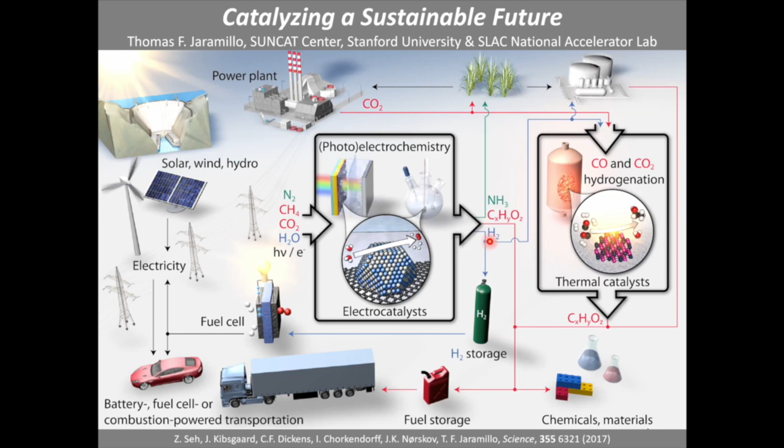And so this really fits within the theme of what we're talking about here with hydrogen and transportation. It's a big molecule that we put a lot of attention to. And let me just give credit to and acknowledge my many partners in this. We are a very collaborative organization, over 70 researchers, as we integrate theory and experiments to ultimately create this new future ahead and open up new possibilities.

So we're very much focused on these chemical transformations, very much focused on catalysis and catalyzing these transformations, and then developing devices and new technologies, new processes that make use of those. And very importantly, we are a partnership between Stanford University and SLAC National Accelerator Lab that brings different resources, different expertise to attack these very important and challenging problems.

So you see a listing of a number of the Stanford faculty that are core to the SUNCAT Center, senior personnel through the National Laboratory, many different collaborative partners, both inside of our ecosystem of SLAC and Stanford, as well as beyond. This is really just to give you a framework on how we operate - theory is, we're a very balanced organization, again, with theory and experiment.

So we have a lot of theory guidance, computational modeling, typically at the atomic and molecular level, that provides some guidance as to what kind of possibilities might exist in developing new processes, new catalysts, new technologies. Then we have a range of experimentalists. I am predominantly an experimentalist who synthesizes new materials, new formulations, new structures. We use advanced tools to characterize them, including tools you can only find at national labs involving synchrotrons or free electron lasers. We test things out to see what works and what doesn't, then feed that right back into theory, and wrap it all in a blanket of data science as we strive to capture all this data and take on new approaches to understand how to make things better ahead.

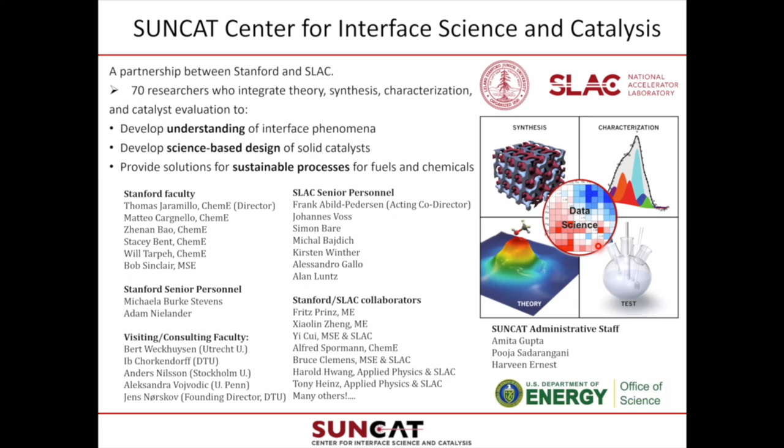So in my last slide, I want to seed the discussion for our particular panel this morning here in California, afternoon and evening perhaps elsewhere. And that is really the future of transportation.

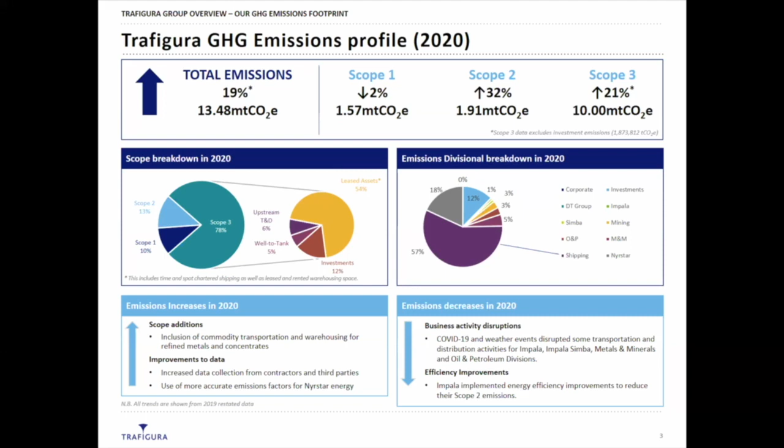And what is the regulatory framework, and what do we need, and what's the challenges? About ship propulsion today, ships burn MGO, they burn low sulfur MGO, high sulfur fuel, they burn LNG, they run on LPG, but the key transportation fuel as of today is heavy fuel oil. In terms of what the key challenge is, again today, the regulatory framework does not provide sufficient opportunity for the industry to decarbonize sooner rather than later.

Just a little bit about global shipping emissions, just to frame it. Shipping accounts for about 2.5% of global GHG emissions. It accounts for 80% of global trade. So shipping is a vital thing transporting our goods around the world. So if we can decarbonize the shipping industry, then we have come far.

The good news is it's possible. The technology is there. The key engine makers are bringing forward the propulsion of the future, and I'll come to what we believe is propulsion of the future, but that is there. It's ready by 2024, 2025. However, a key challenge is the economics.

Everybody says that they want to decarbonize. The ship owners, who account for 78% of our emissions, say they want to decarbonize, but the numbers don't work. So if we go a step back, in 2019 we initiated a study with a leading American university, unfortunately not Stanford, but that will be the case in the future, I believe.

And one of the key conclusions from this study, which took half a year between them and us, was that the transportation fuel of the future is hydrogen-based. So to answer one of your questions earlier, Thomas, what energy sources can be the transportation fuel of the future? We are certain the transportation fuel of the future is hydrogen-based. When we say that, we mean green methanol and green ammonia.

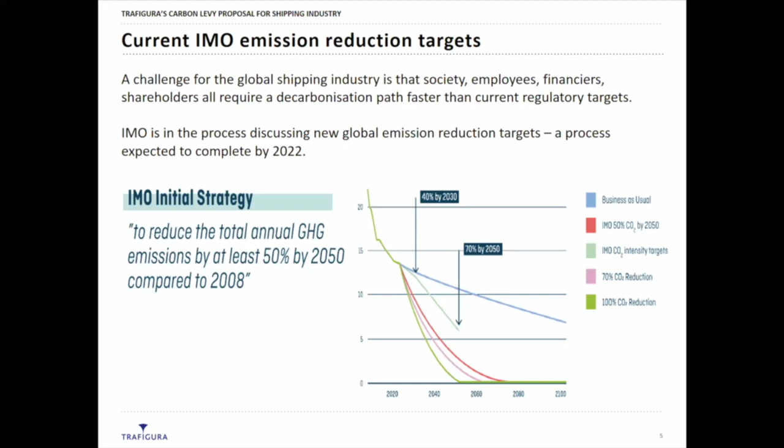However, to do something, we need to get through a highly complex and bureaucratic IMO. So we need targets to be revised. It's happening, but then we also need a regulatory framework to change the fundamentals of how the industry can invest into low and zero carbon fuels.

Last year we brought forward our IMO shipping proposal, which was the first one. About the IMO, it's a highly bureaucratic organization. There's 174 member states, it's consensus driven, and there's a lot of politics involved. You have a lot of small island states which are afraid of higher transportation costs.

You have commodity exporters, such as some South American countries I will not mention, who are afraid of having increased exporting transportation costs, thereby making their commodity uneconomical. So there's a lot of thought that needs to be put into mind when you need to get through the IMO with a carbon levy proposal.

We calculated that we need a levy of $250 to $300 per tonne of CO2 equivalent emissions. This is likely to come down over time as electrolyzer technology improves and as the industry uptake of zero propulsion ships becomes the norm.

What has been important for us, and we believe for the industry, is that we are very engaged within the industry in various associations, etc., in terms of understanding what it takes and how the industry can make this happen and support a carbon levy. Probably for the first time in history, we have all players in the industry asking to be regulated. Certainly chartering traders have not asked to be regulated before, but this is simply because we need the regulation to cost-neutralize the low and zero carbon fuels.

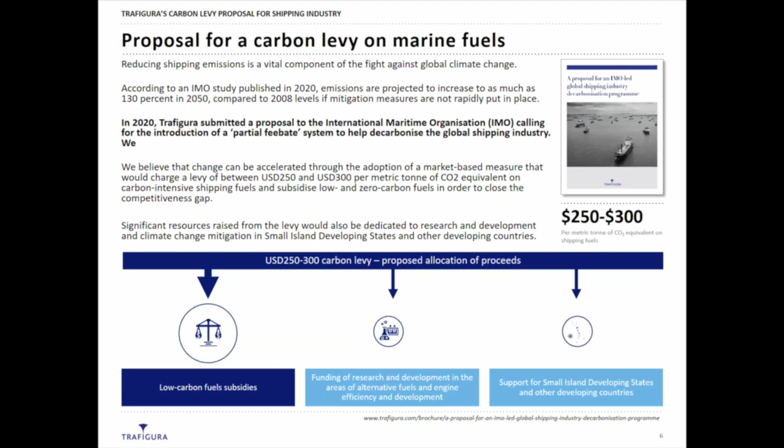And now the small island states, who we've been working with separately, have brought forward a proposal at the next MEPC meeting - Marine Environment Protection Committee, which is the governing IMO meeting - where a proposal for a carbon levy is now to be discussed in June this year. That's fantastic.

One of the key challenges IMO member delegates have is that you have climate ministers and transport ministers who say we want to decarbonize. However, one of the challenges we see - and we participate in a lot of discussions with NGOs, with World Economic Forum, various organizations that ask for our participation - is we see politicians talking, but we don't believe that they truly see what it takes to change.

And what it takes to change, again, is the carbon levy. The transport and climate ministers can actually go and push the IMO member delegates, and they need to do it. But they need to understand what they need to do.

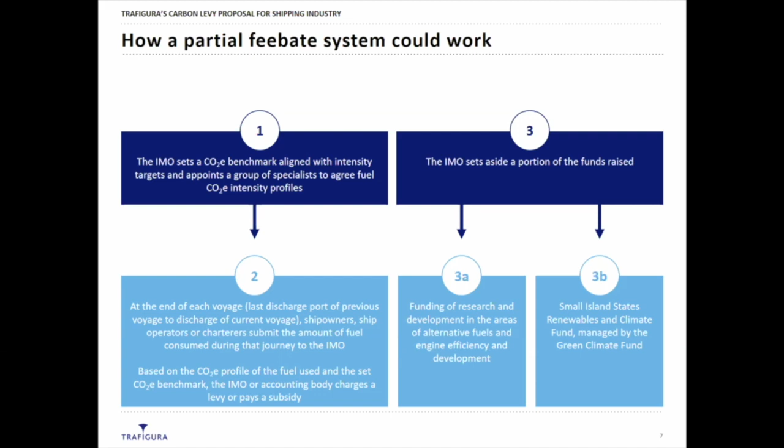We're working in the Getting to Zero coalition, one of the many coalitions, which is World Economic Forum run together with Global Maritime Forum. We have a target on targeting these ministers for COP26, and we are very hopeful it's possible. But even two months ago, a lot of people were very pessimistic. Again, we need the regulatory framework in order to make this competitive.

Just a little bit about how we intend to do it. The slide here, again, defines the intensity benchmark - we set the energy intensity profiles, calculations come out. You have high carbon and low carbon fuels.

Within the industry there's another initiative, which is Sea Cargo Charter. The Sea Cargo Charter makes ship owners responsible for reporting the emissions for each voyage. This is a new charter which has been established in October last year. It's great - there's no global accountability measurement on shipping today. This is for the transport industry: dry bulk, tankers, gas carriers.

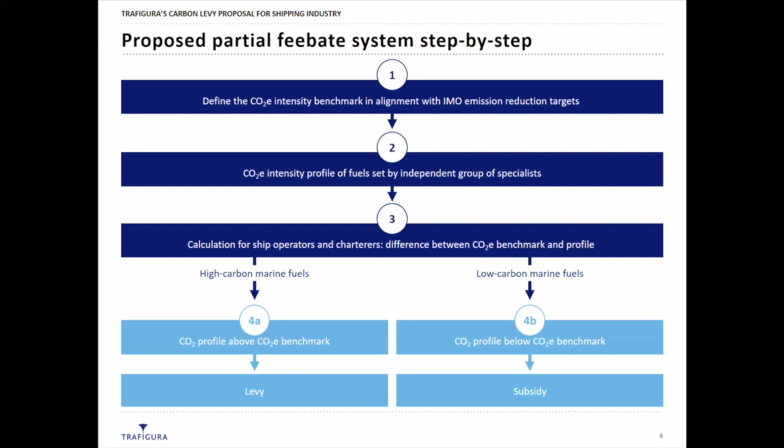Container industry is looking to have a similar equivalent implemented - it's not yet there. But by having the Sea Cargo Charter reporting, suddenly we are in the process - I'm co-chairing that - of establishing a global reporting tool where we actually have data, and we're getting reliable data. Companies are becoming reliant on an apple-to-apple comparison basis on what ships we have used in the past and what emission profiles they have.

My last slide, and I can talk for a long time, just a little bit about why we believe green ammonia is the transport fuel of the future. The CO2 emission saving is huge. It's about 93% compared to today's transportation fuels. Green methanol is less, there's a carbon content.

There's a challenge for the shipping industry. Should we overtake green methanol and burn the carbon and overtake other industries' problems? Or should we just go to green ammonia, which is the cleanest transportation fuel? We believe it's green ammonia, but we are cognizant that green methanol has a chance if you can get carbon capture. And the question is, how will that carbon capture look?

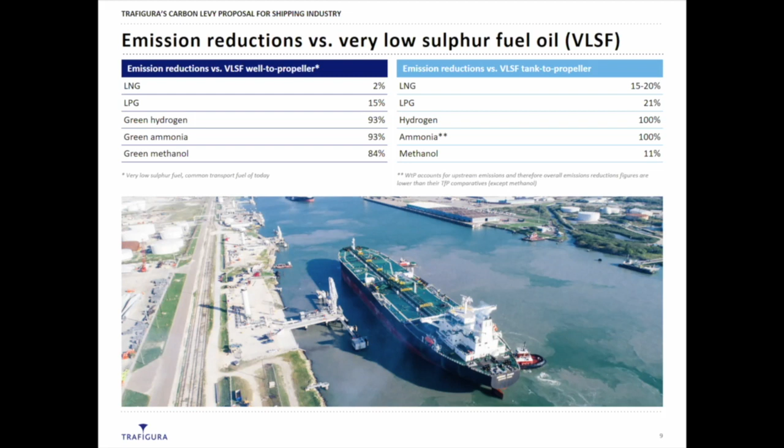That's again for technology providers to determine over time. But again, the good news, shipping can decarbonize. It's not as unrealistic as it was. There's a lot of positive momentum. We need it to happen. It can happen. And huge corporations, including our own, will hopefully be given a chance to choose between low and higher carbon ships sooner rather than later. Thank you very much.

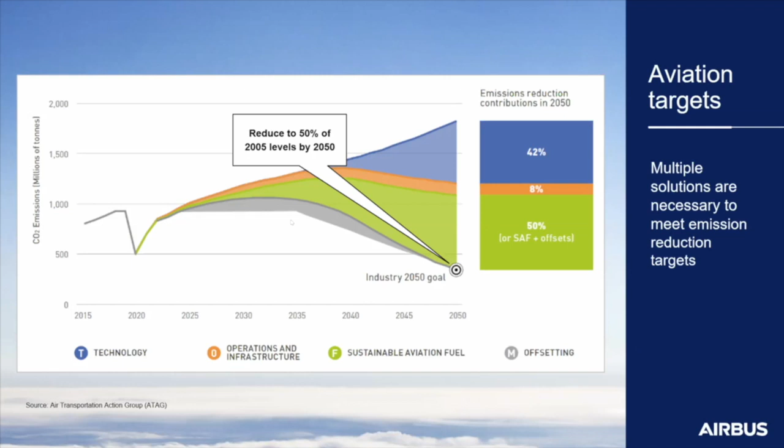All right, moving on, real quick about sustainable aviation fuels. Sustainable aviation fuel, rather than using petroleum, uses other feedstock, whether that's environmental or industrial waste, food byproducts, cooking oil, or even agricultural products like corn for ethanol, or a variety of different feedstocks. And you can use that in today's single aisle aircraft, and of course our twin aisle wide body aircraft, as a direct drop-in replacement for fuel. All modern aircraft are approved for up to a 50% blend of the various biofuel and sustainable aviation fuel products.

And there have been over 250,000 flights and counting, probably well over 300,000 by now, that have some portion of their fuel mix come from SAF. And that's going to be a huge impact, because about 85% of the reduction is right there by using this closed loop. You pull the carbon out of the atmosphere, you put it into the sustainable aviation fuel.

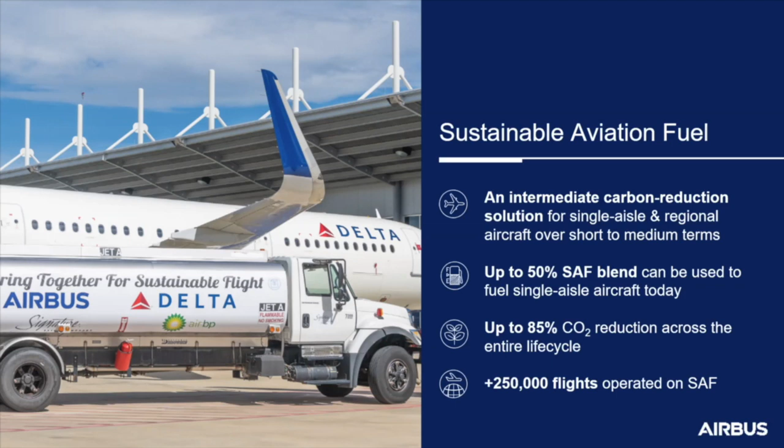The operations is going to be another part. I talk about how automation is going to really help us out, and I've just got a few real quick examples here. A lot of it has to do with routing.

How do we make sure that an aircraft, once it's ready to do its flight, has the most optimized route for its emissions, taking into account weather, other traffic, and winds? Optimizing that so that when the aircraft starts its engine, it can taxi right to the end of the runway, take off, climb unrestricted to altitude where it's most efficient, and as it approaches its destination, stay at that efficient altitude right to the point where it can make a low power, low emission descent, land on the runway without having to hold, without having to divert, and taxi to an open gate without their engines running. That's where automation and big data come in, handling the thousands and thousands of flights every day.

Another thing we look at is how the aircraft themselves operate. We're working on automation inside the aircraft, inside the cockpit, because we believe automation can manage the aircraft better than a human pilot can, optimizing power settings, trim configurations, and all the other settings in an aircraft to reduce emissions.

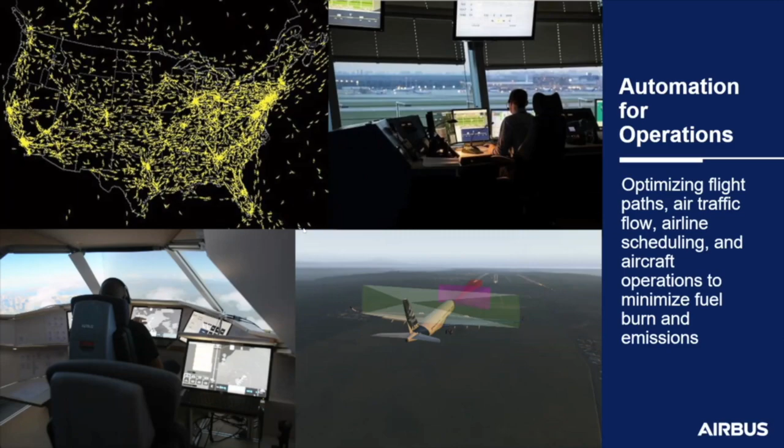As we get into new technology, our big push is hydrogen, and why it's zero emission. It's not just zero carbon dioxide emission, it's zero NOx. It's reduced contrails, reduced cloud formation. All the other climate change gases don't happen when you're burning hydrogen.

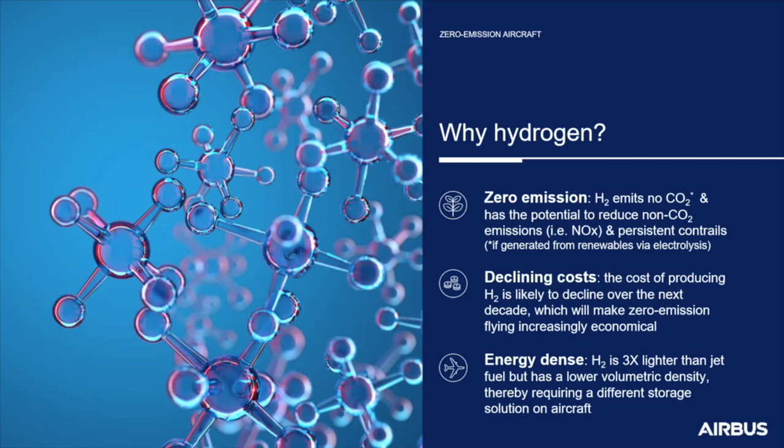I don't need to talk to this group about all the issues and why you want to be using hydrogen. But I'll point out that, as you've heard, it has 3 times the energy density of jet fuel. The issue is it takes up 4 times the volume, and volume is very important. Volume means weight, weight means inefficiency. When you're trying to take these up to 30,000 plus feet, those are very important, and those are going to be the challenges for aviation.

We see hydrogen being used 3 primary ways within aviation. One is direct hydrogen combustion. You can take liquid hydrogen and put it into a jet engine today, and it's going to burn. The Air Force did that on a B-57 bomber back in 1955. The Soviets took a Tupolev, I think 157 or something, and converted it to run on hydrogen back in the late 80s. These are not new technologies, they exist, and we can take an engine today and optimize it for hydrogen.

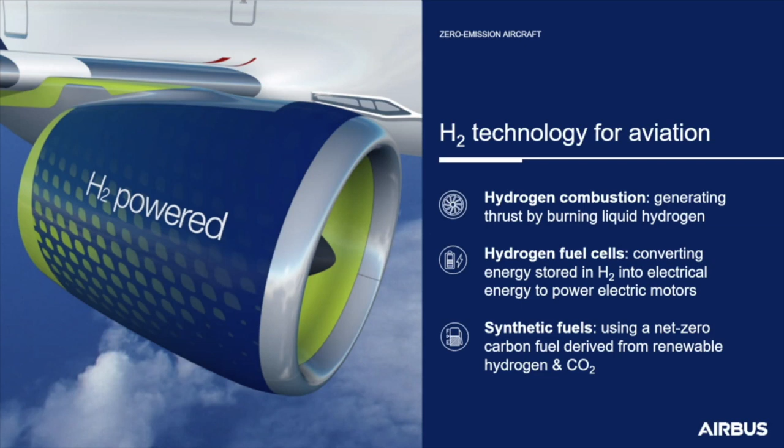Of course, the other option we've heard a lot about is using hydrogen for fuel cells, converting the hydrogen to electricity, and then running electric motors for propulsion. The third is using hydrogen to actually make synthetic aviation fuels, not using sustainable bioproducts and other resources on the ground, but actually using hydrogen along with carbon dioxide pulled straight from the air, creating hydrocarbon chains that can make synthetic aviation fuel. So that's the three ways to use hydrogen in aviation.

The challenge, as we've discussed, is that the technology exists, but we have to bring the weight and the cost down for it to be suitable for aviation. We've heard from people over the last 2 days about availability and cost - they're coming down, availability is coming up, costs are coming down. We see that being not just an issue, but something that's going to be taken care of.

Infrastructure absolutely is an issue. And of course, regulatory acceptance, not just on the regulatory and certification issues, but of course, passenger acceptance as hydrogen-powered aircraft are introduced.

So Airbus, late last year, introduced 3 concept aircraft, which we are calling our Zero-E. You can see the top one looks like a standard or traditional tube and wing turboprop aircraft, holds about 100 people, goes about 1,000 miles. On the bottom is a turbofan aircraft, again tube and wing, 2,000 miles, about 200 people. And then in the middle, you see this blended wing body. Again, it's 2,000 miles, 200 people, but it takes advantage of some real advanced aerodynamics, and optimizes how you would put fuel on board such an aircraft.

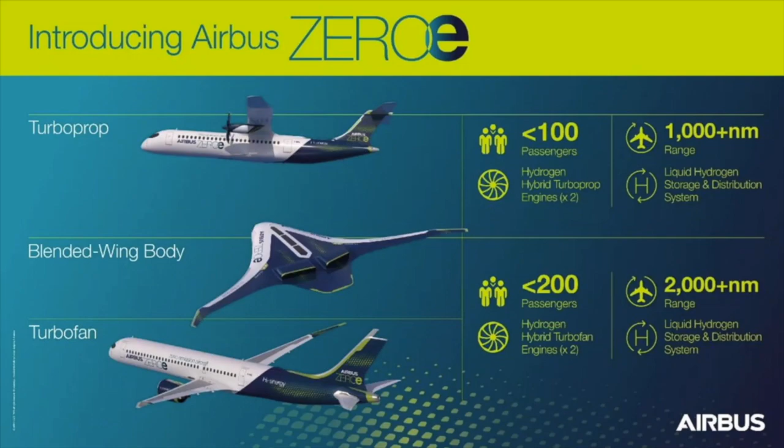A little bit about the engines on these. They are hydrogen hybrid fuel cell electric engines. A big mouthful, but what it means is we're taking the liquid hydrogen, burning it directly in the gas turbine, whether it's a turbofan or a turboprop. But that engine, that turbine is optimized for cruise. But you need more power than just the power of cruise to get up to altitude for takeoff or aborted landings or all that. So in that case, we have an electric motor on that engine to help the turbine get more energy that is necessary for climb.

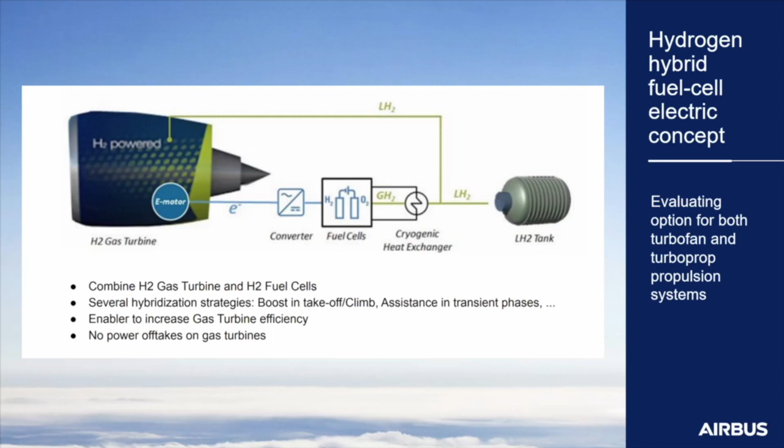And the power from that comes from fuel cells. So we have the liquid hydrogen direct to the turbine, some of that going through a heat exchanger, powering a fuel cell, creating electricity, and having that electric motor for those climb and boost situations. Oh, and by the way, a point here is that fuel cell now can provide all the electrical power for the aircraft. And where we have in today's aircraft, an engine has generators or alternators, it has pumps, hydraulics, and all these different fuel systems on it. You don't need to do that when you have a fuel cell providing enough electricity to run all those systems elsewhere on the aircraft. So the gas turbine is optimized for the cruise phase.

Another aircraft, here's another concept. This is what we call the pod. And in this particular image, it shows 6 of these pods. They're completely interchangeable, and each pod is a complete propulsion system. It includes a liquid hydrogen fuel tank, a heat exchanger, a fuel cell, all the electronics, an electric motor, and a propeller. You note there's something different here. I did not say turbine. This is a fully electric pod that would be a complete fuel system.

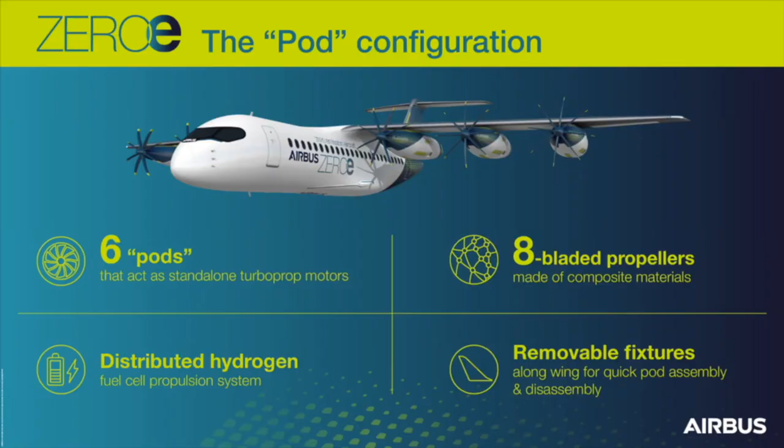And you could design the aircraft. Some might have 2, 4, 6 pods, depending upon what your mission is and what the design point is for that particular aircraft. So a project we just announced last week is looking at this fully electric system. And the point, we did a project over the last several years where we were looking at high power electric motors for aviation. And one of the issues you have when you bring these particularly high voltage systems up to altitude is arcing. You have great losses due to the amount of power running through, quite frankly, massive cables.

So the Ascend program uses superconducting power systems and cryogenics to keep those systems running at optimal efficiencies. So you could use the liquid hydrogen to actually cool the system so that you get, bring the voltages down from like 3 kV to down to 500 volts. And now you can reduce those losses due to thermal issues and become much more efficient. And we're running this program. It's actually been going on for a little while. We just announced it last week.

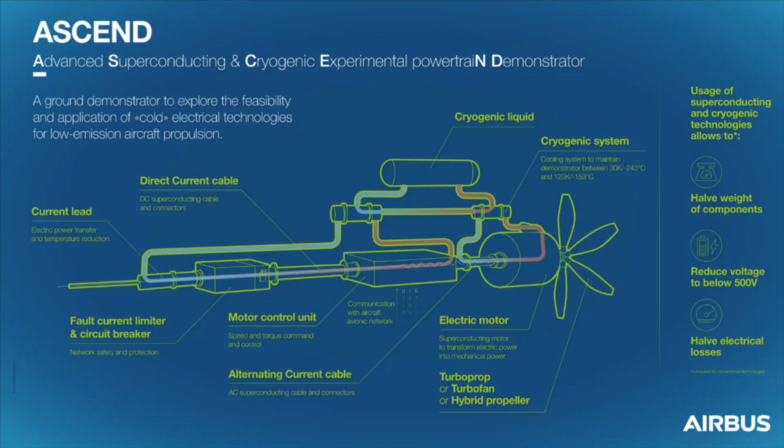We're going to be building a demonstrator, which will be running in our test cell to verify this system as we make the determinations of how we move forward as we are shooting for that 2035 entry. I'll get to the timelines in just a moment.

So here's our path to zero emission. We are looking at a variety of different technologies, pathways, and aircraft configurations to determine not only what is going to be best, but what is feasible and what we can get to the market that our customers, the airlines, will use and can carry passengers and cargo anywhere in the globe. But we're looking at everything.

It's not just about the climate impact. It's what is the potential for the aircraft design, of course maintaining all the safety levels we have today, maybe even going up another level, looking at how you maintain the aircraft, how you industrialize and build these systems, operations, market, infrastructure, ecosystem, all those different capabilities that go into operating in aerospace. Those will all go into the evaluation we have for this next generation aircraft.

And obviously, we are not doing this alone. We have a whole lot of various stakeholders, collaborators, and even some of the folks you've heard over the last couple of days we're working with.

Aerospace doesn't sit in the world of transportation alone. We're learning and contributing to rail, ground, and surface transportation, heavy duty. All those are going to work together to build an ecosystem that will support all these various modes of transportation.

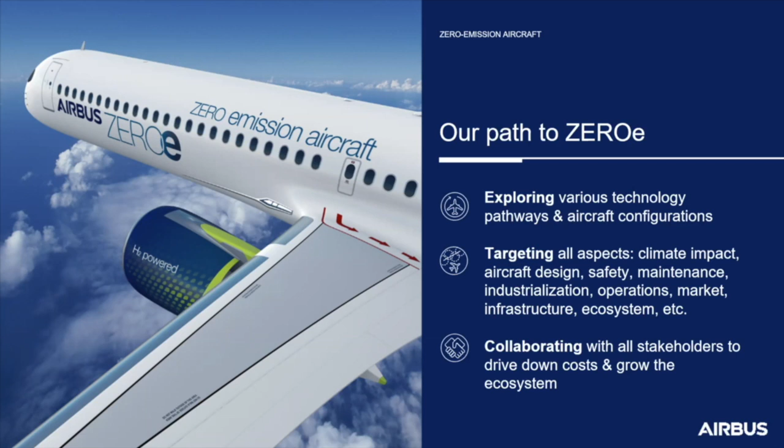One of the ones I want to talk about is we see an opportunity to use airports as hydrogen hubs. You can block out the aircraft, which won't show up for several decades, but think about all the other things that happen in an airport - all the ground logistics, whether it's the equipment supporting actual airplane operations, from baggage carts to tugs, but then all the ground transportation, the buses and the cabs and all the vehicles that go in and out of airports.

You could use the airport as that hydrogen refueling station. Think about all the logistics, all the cargo and the trucks coming and going, and of course heating and power and all the other things that happen, not just at the airport, but at the infrastructure, the industry around those airports. And then when you bring in the airplanes, now you've got a hydrogen ecosystem ready to support it.

So there's a lot of things we're looking at. Several studies are going on in Europe, looking at some specific airports that we see converting to hydrogen hubs within the next decade.

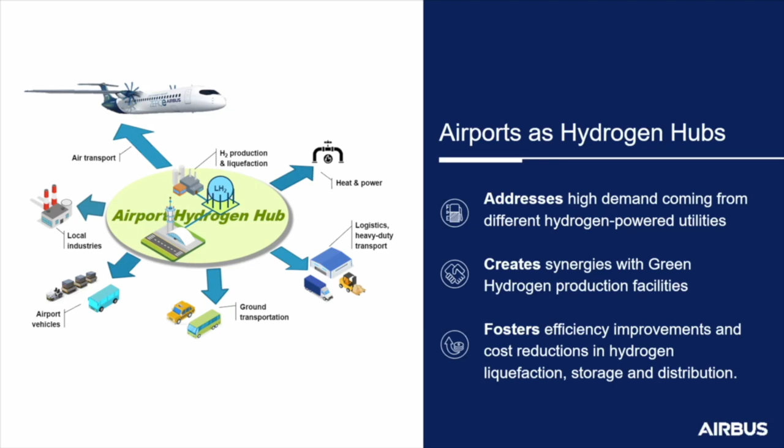We made a public announcement of it last year, and we're in the phase right now where we're spending the time not only finding out what is feasible, what is possible, but making sure that they are going to be ready for use. And in 2025, we're going to make a product selection.

What is the configuration going to look like? What's this aircraft going to be? And we're going to go ahead and launch it. So we've got this time period right now to answer all the questions. And we're going to drive the stake in the ground in 2025.

We're going to start designing the aircraft, going into working the supply chain, the industrialization, and start building those first prototypes coming off the line, work through certification issues, and then with the goal of 2035, having an airline enter these aircraft into their regular service.

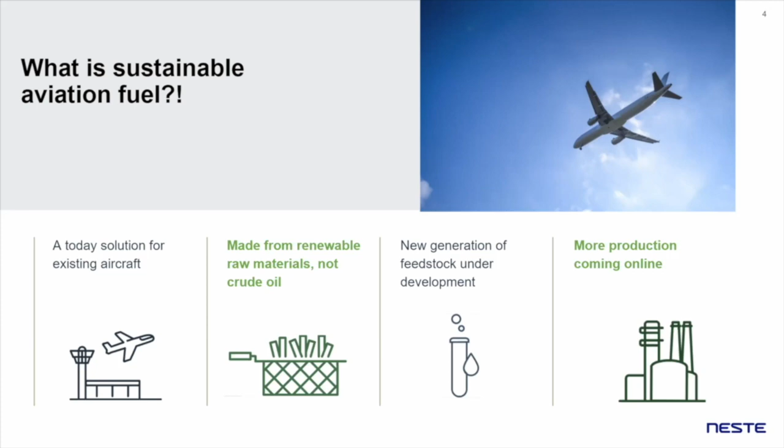I said that this is fuel available today. Just a couple of examples.

We've been partnering with, for example, American Airlines, and we have an industry-leading sustainability agreement with them. They are really looking for ways to reduce emissions for their customers. San Francisco Airport has called it a climate quantum leap. Because sustainable aviation fuel is a drop-in solution, we've been able to overnight practically start putting sustainable aviation fuel into all of the planes leaving from the airport. So it's now readily available for cargo, commercial, and business aviation at the airport. Neste and our partners are expanding that to many airports in California and beyond, just as we are in Europe and other regions.

Another example is Signature Flight Support, which serves private aviation customers in FBOs across the country, and they are now allowing their passengers to fly with a much smaller carbon footprint than in the past. I think this is one of these things we see coming up from the customer level—customers really demanding that airlines provide sustainable solutions in a safe and efficient manner. Neste, for example, recently announced that all business travel from Neste employees will be compensated through sustainable aviation fuel.

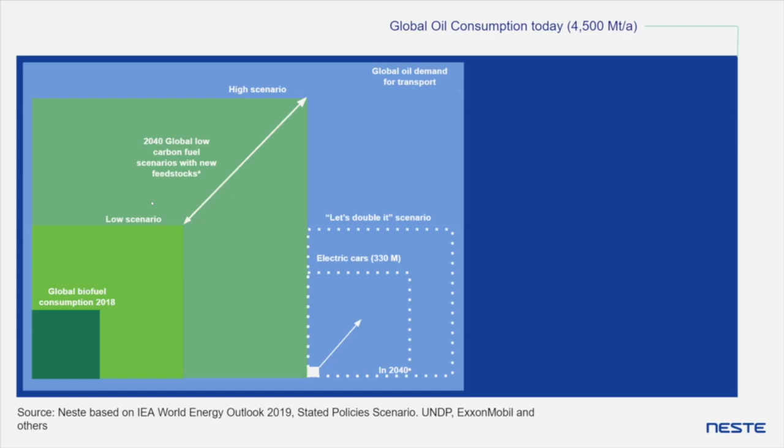This is data that Neste has put together based on world energy and a number of other scenarios. World oil consumption is about 4.5 billion tons per year, of which global oil demand for transportation is about two-thirds. Then we start seeing what electric cars could do, what global biofuel consumption was in 2018 and what the potential is, and what the scenario is if we were to double electrification. What it actually shows is that the decarbonization challenge is huge, and we need all the solutions—electric cars, electric planes, hydrogen, but also renewable bio-based fuels and renewable fuels, which are already contributing greatly to carbon reduction today.

We really see that low carbon fuels are scalable. It's a solution that works and can really greatly contribute to reducing greenhouse gas emissions. So we need to use that potential.

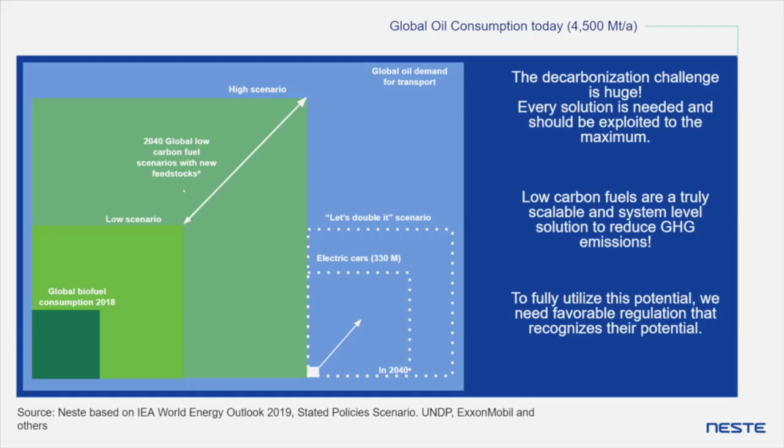What is needed, similar to what we heard from the first speaker of this panel, is clear policy support. We need clean fuel standards—this really incentivizes the production and use of renewable fuels. But it has to be grounded in life cycle analysis, because cost is a big part of this. We need a market-based, technology-neutral price on carbon per sector, because not all sectors have the same cost to decarbonize.

A light passenger car is relatively easy to electrify, whereas there are no electric cables long enough to power a plane. We also need to recognize that renewable fuels may never be cheaper, but at the same time, fossil fuels may no longer be acceptable either. So we need to understand the true cost of carbon, and whether it will really be justified in 10, 20, 30 years from now for us to continue burning fossil fuels in planes. I think the answer is clearly no.

So we're excited about planes flying more and more on sustainable aviation fuel, and excited to see corporations wanting to join this movement as well. I'm pretty sure we'll also see it from the individual side, where we make choices to fly on, say, an Eco Plus seat alongside an Economy Plus seat. In terms of policy, to help balance out that cost differential, having incentives like a sustainable aviation fuel blenders tax credit would help support production, making it more available, able to be transported across the country, and used safely and efficiently in airplanes.

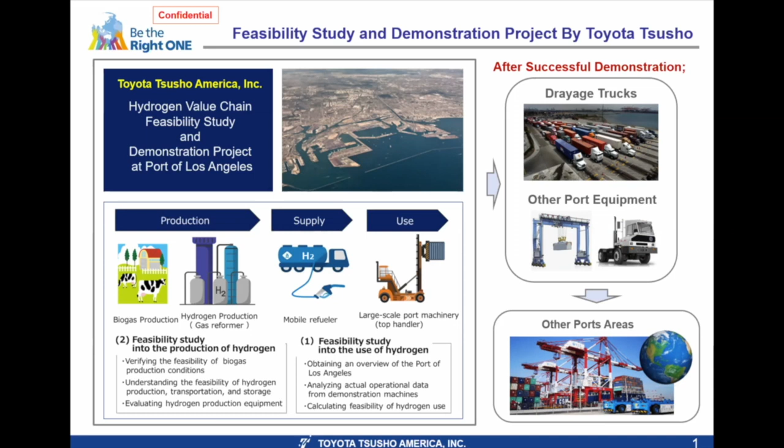Just to elaborate a bit more on our hydrogen value chain concept: currently we have experience operating a hydrogen station business in Japan, and a hydrogen station by itself is not a very economically viable business model.

So for the United States, we try to combine this whole value chain into one business model—from upstream, energy source, production, storage, distribution, station, and market creation and environmental projects all together—to create synergy business-wise, but also to try to generate supply and demand at the same time.

One common challenge we hear when discussing hydrogen society is: who should come first, the hardware or the hydrogen supply? It's always a chicken and egg discussion. So we try to create demand and supply at the same time, so that hydrogen society will come sooner and accelerate market demand.

As I explained, we invested in a biogas project in Central Valley, California, and we are also building a small decentralized hydrogen production hub near the Port of LA, so we don't need to transport the hydrogen very far—transportation cost being the main cost in today's hydrogen cost structure.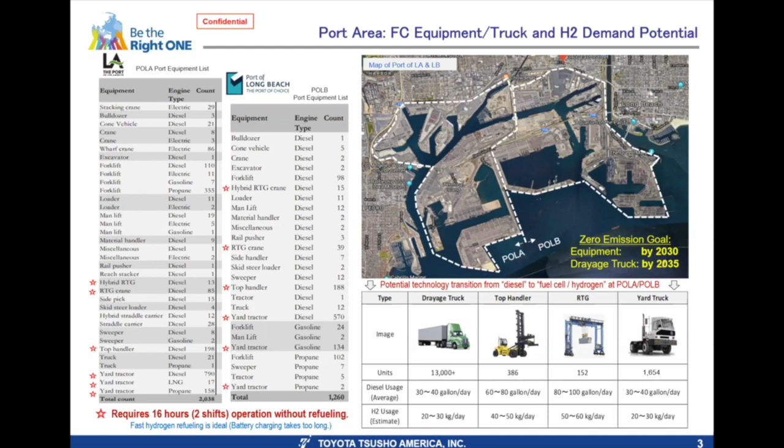On top of that, the drayage trucks that are coming in and out of the port area daily, about 13,000 trucks, are also estimated to use 20 to 30 kilograms of hydrogen per day. So we figured that the port area is probably the market with potential hydrogen demand that will come soon. As you can see here, the Port of LA and Long Beach have a zero emission goal by 2030. All equipment must be zero emission, and drayage trucks must be zero emission by 2035. So those goals are also pushing port terminals and fleet operators to think about the technology transition.

Each demonstration unit has a different characteristic. So for the port terminal and also port authority, they are interested in watching these different demonstrations to see which one will be the most suitable, economically and environmentally viable project.

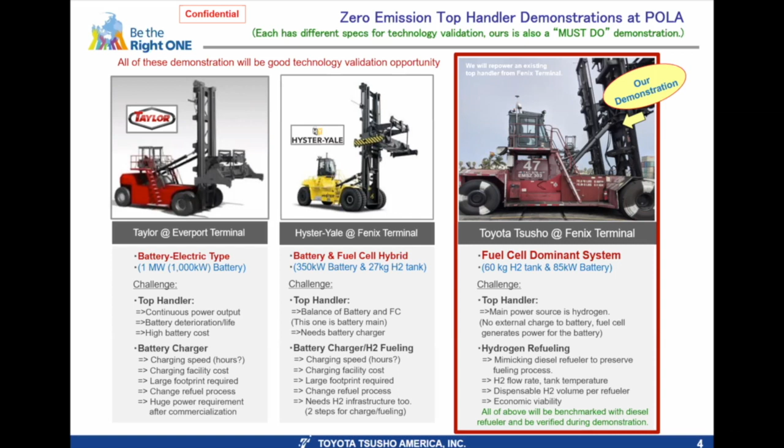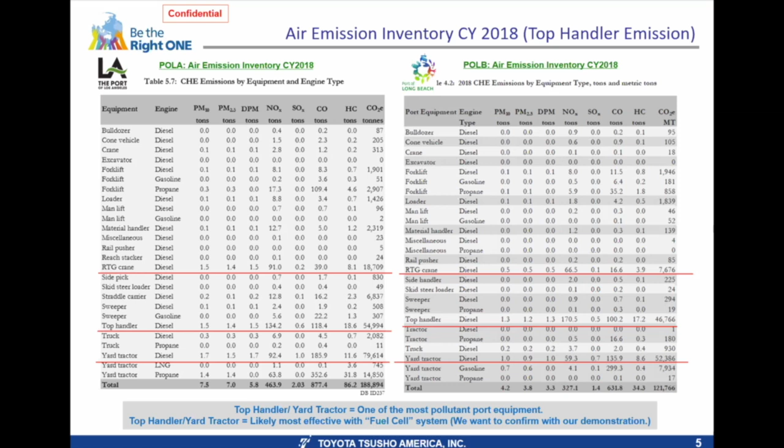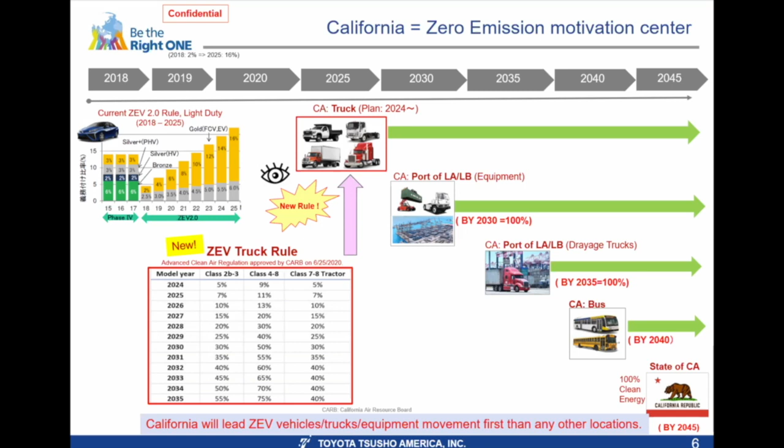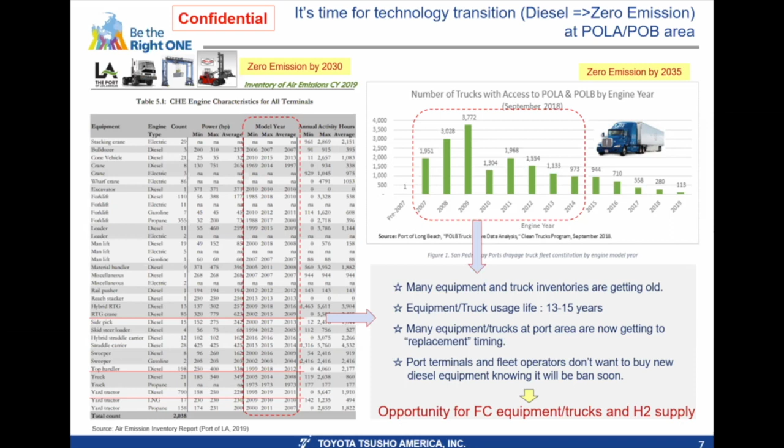So all terminals and drayage fleet operators, after our discussion, said they actually need to renew their trucks and equipment sooner than this port goal of 2030 or 2035. So our demonstration can be very important to prove the concept that the performance of fuel cell equipment and trucks is similar to diesel equipment and trucks, so that we can gain their trust for their consideration of this zero emission technology transition.

From Japan, we have extensive experience with hydrogen. We have several demonstrations going on at this moment for wind power to hydrogen, solar power to hydrogen, and biogas to hydrogen demonstration. We also operate 8 hydrogen stations in Japan. So we want to use our experience to succeed with our demonstration in the United States.

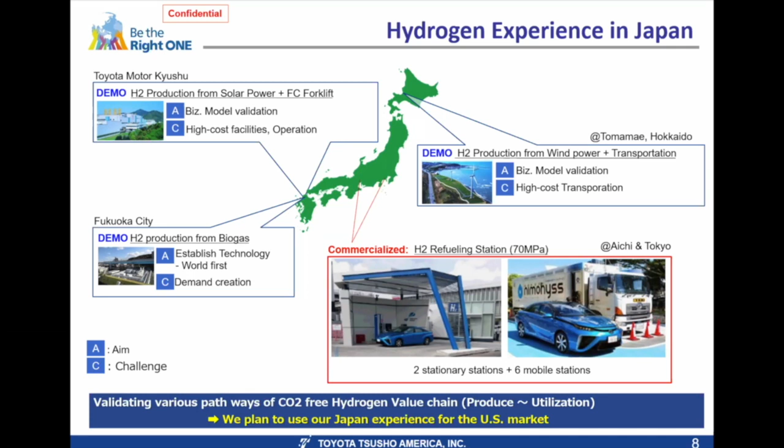Lastly, the story is beautiful, but there are tons of challenges to overcome. First of all, hardware commercialization by OEM, especially port equipment OEM. The zero emission goal is currently mainly coming from the LA area only, so port equipment OEMs are still not very willing to develop and mass produce zero emission equipment very aggressively. So we need to make sure we communicate with them about the needs of this equipment from the OEM side, and also the cost gap from the current scheme.

Unfortunately, the hardware infrastructure and hydrogen fuel itself, compared to diesel, is much more expensive still—maybe two or three times more expensive. So our demonstration is okay, but after demonstration, how can we reduce this cost so that the user of the equipment will be comfortable switching the technology? So that's also a challenge.

And also regulation adaptation, particularly refueling protocol, fire code, and permits. Particularly fire code—if we try to operate a hydrogen mobile refueler at the port area, there must be fire code approval, which takes quite a long time. So this type of regulation also needs to be adopted soon, so that when hardware and infrastructure is available, regulation is not going to slow down the process.

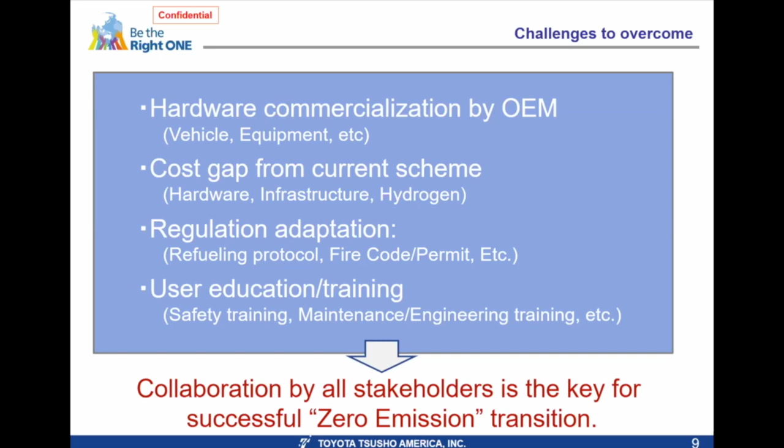Lastly, user education and training is crucial, because when we talk to fleet operators and port terminals, the first thing they say is 'is hydrogen safe?' So we want to make sure all this hydrogen equipment and trucks are safe to operate and can perform similar or even better—actually, noise-wise, fuel cell systems are much quieter than diesel engine systems. So we need to educate the users so they feel comfortable moving towards this new technology. We will need collaboration from all stakeholders—that's the key for this technology transition's success.